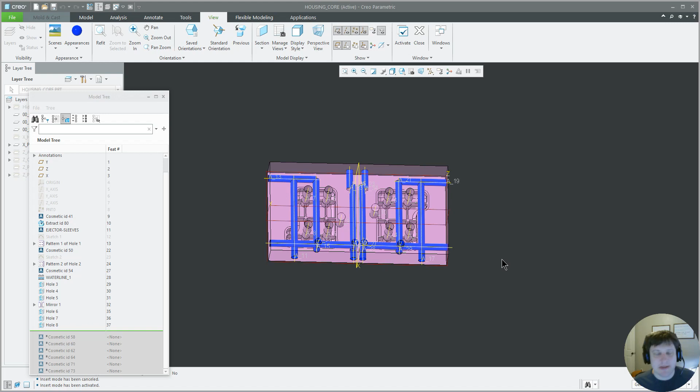We're still working on that injection mold, the first one. I mentioned last time that I was not happy with the water, and coming back to it and looking at it, I can't believe I thought this was a good idea in the first place. So we're going to come over here and delete everything we've done other than the waterline feature. And I have another way of doing this.

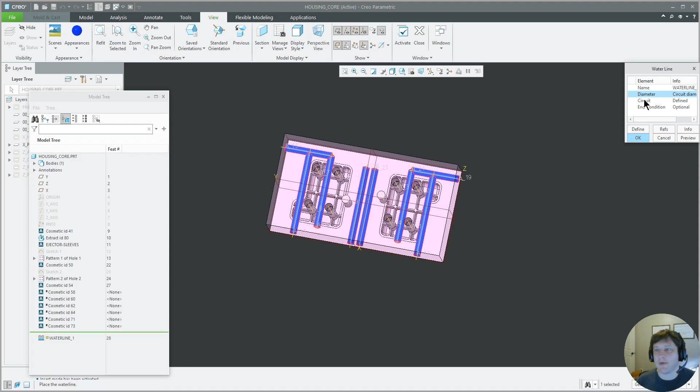And we're going to edit circuit, define, sketch view. We're just going to delete all these. Okay, so what we want to do is we want to come in here, over here, out here. We want to come out here, down here, out here. And we want to come out here.

I'm going to do the same thing over here. We're going to go in here, out here, which actually this will need to be like that. And then over here, over here, and out here. And this will need to be out here, there, there. So then we have in, around, around, and out. In, around, around, and out. All in two circuits. All do not interfere with anything. This is better.

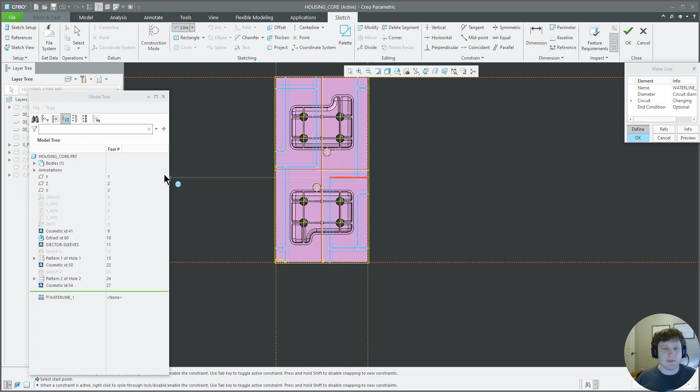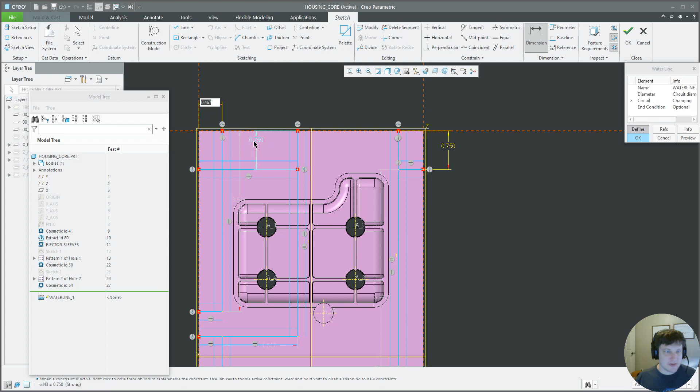So now we dimension this stuff. This doesn't really need to be that close to the edge, so we'll make it 0.75. This 0.75 as well. This kind of needs to be close to the edge. We'll make it 0.5. So 0.5 over here as well. And on this, I need to watch that distance. So we'll make that 0.313. Keep it away from that. There.

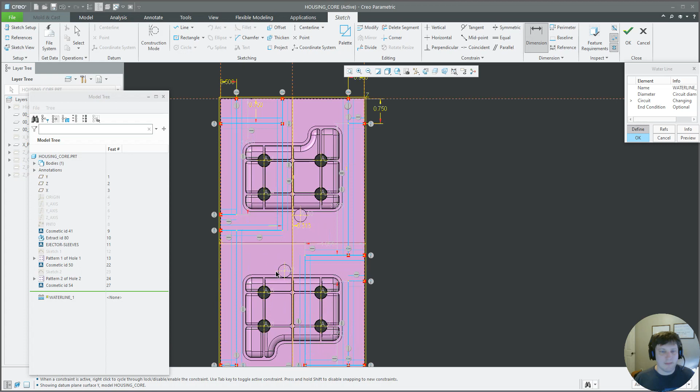And then, let's see here. Here, here. Make that 0. Make this to here. That 1. This 0. This 0. This 1. This 0.75. Oh, they're already. Oops, I accidentally hit num lock. And this 0.313.

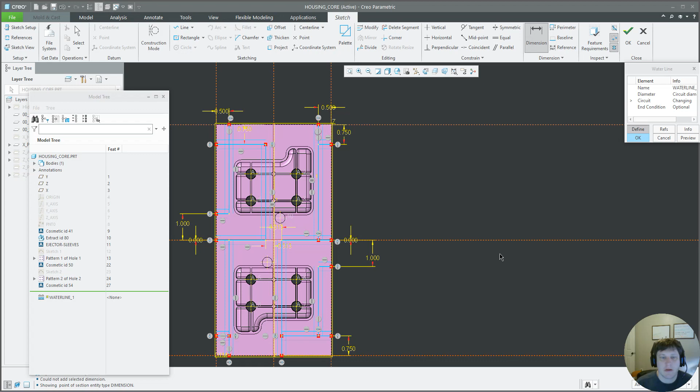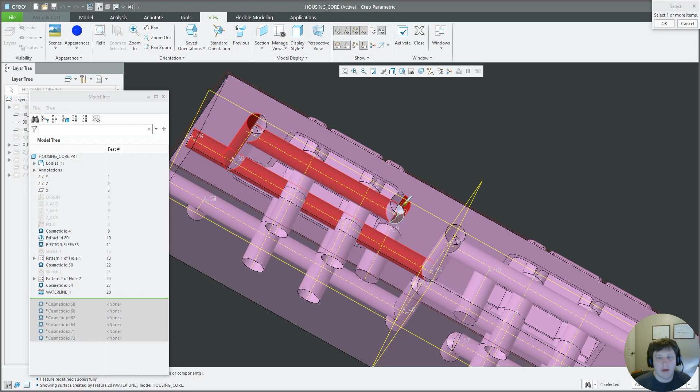And there we have everything symmetrical, so it'll cool evenly in the two blocks. So we have our water circuit in. Now let's color these different colors so that way we can tell which one's which. We're going to color them different shades of blue. We'll color this one dark blue because it'll be easy to see. There. I'll color this one this light blue.

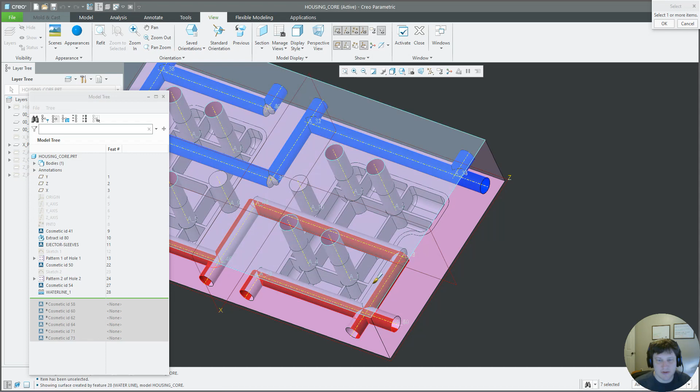Normally I used to reserve these colors for machining operations, but since I don't work for that company anymore, there's no reason to do so because it had to do with their programming software. So instead I just use them as the best fit for showing things.

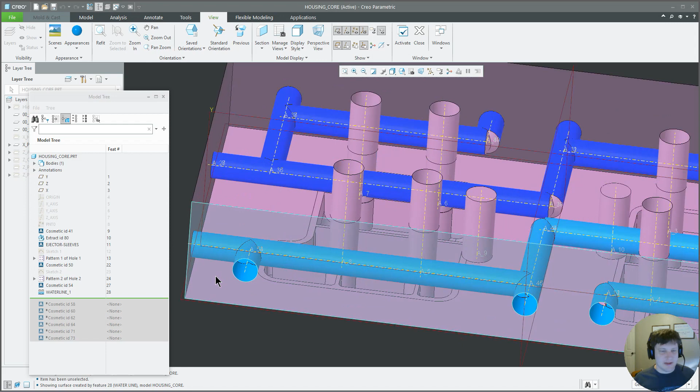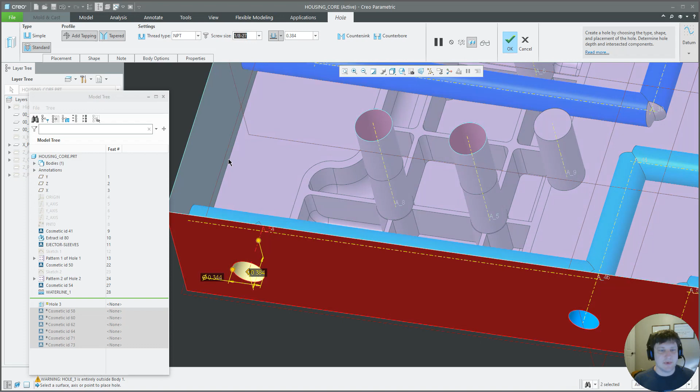There. Now we do need to add pipe plugs to all these because right now they're just blind holes. There's no way to plug them to keep water from coming out of them. So what we want to do is go to hole, standard, tapered, NPT, 1/8 inch NPT, that's the right size, confirm.

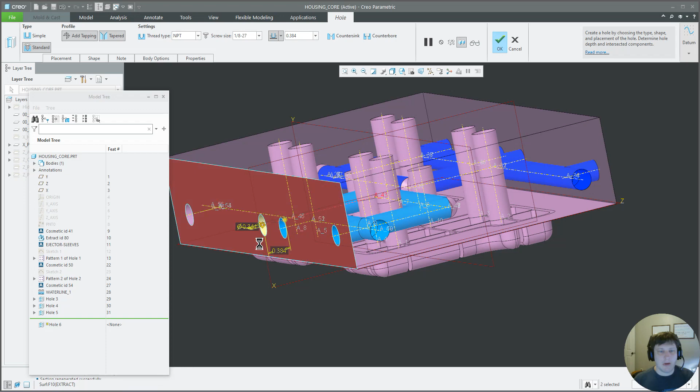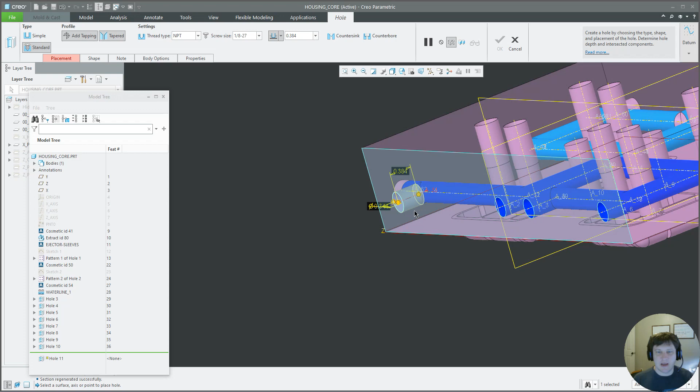Now I can go through that all over again every time, or I can just hit Control C, Control V, and I can just select my axis. Once I have hit Control C, I just need to hit Control V. You cannot do that if I were to put this one on a pattern, like pattern it between these two; then I wouldn't be able to Control C, Control V anymore. It has to be a blind hole.

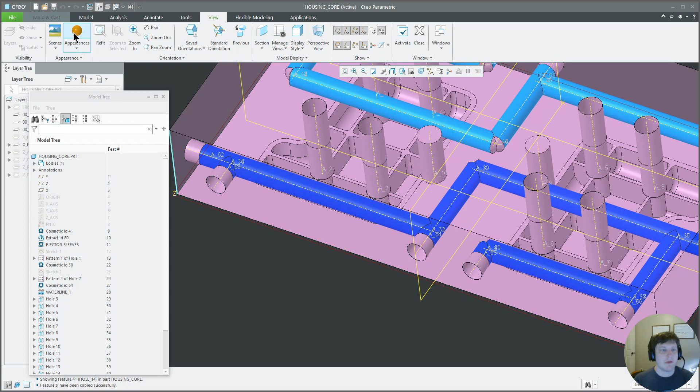And if we want to make it easy on ourselves, we'll view, color, we'll make these, and these the different colors so that we can tell that those are the exit and entrance lines for the mold. So when we put them in the other blocks, we're fine.

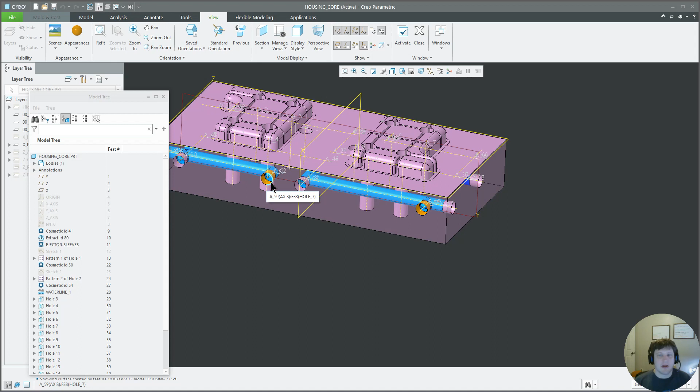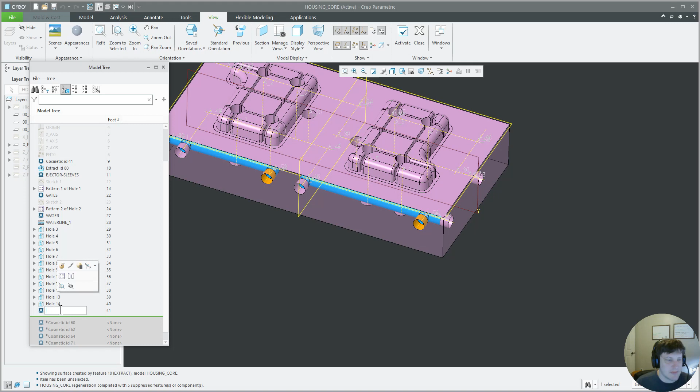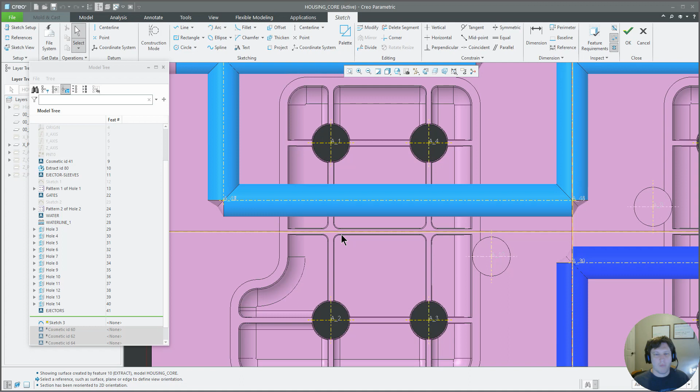Now, really, I don't really want to get into ejectors right now because, well, why won't this resume for me? There we go. Oh, let's name these real quick. These are my gates, our water. This is my ejectors. So ejectors. So we're going to come in from the back. I'll sketch view, sketch. Now we're going to come in here and really, let's see how this works.

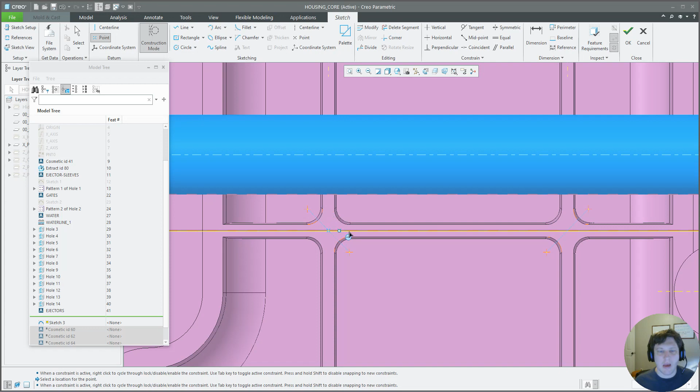So we can put a 98 ejector pin, maybe about 100 thousandths from the wall. So I'm happy with that. We can do that. So we'll put 2 ejector pins, and we'll just do this to place them. That way they'll be in the center of that rib. One right here, one right here, one right here, one right here.

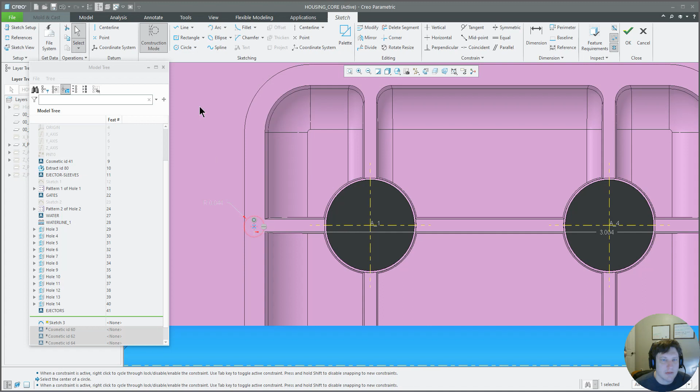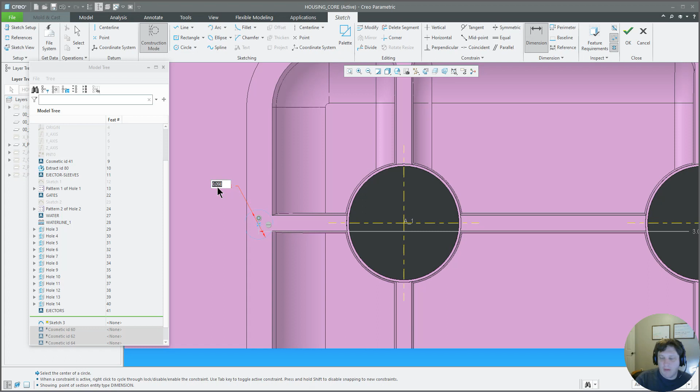Now these ones, so we're gonna go 98 ejector pins. Okay, so 0.098, not a radius. Watch that. Double click, center mouse, 0.098, actually it's 0.094. And just, can we get this ejector pin on there?

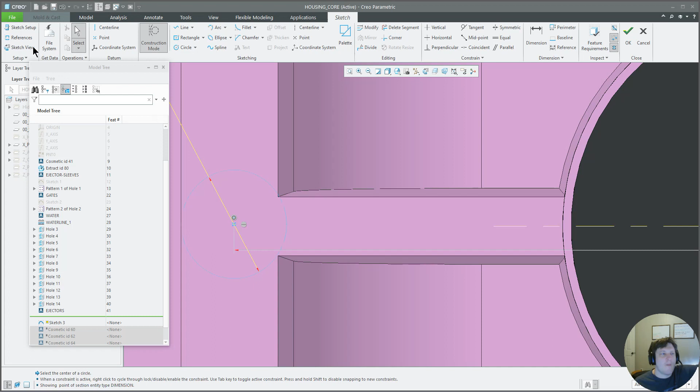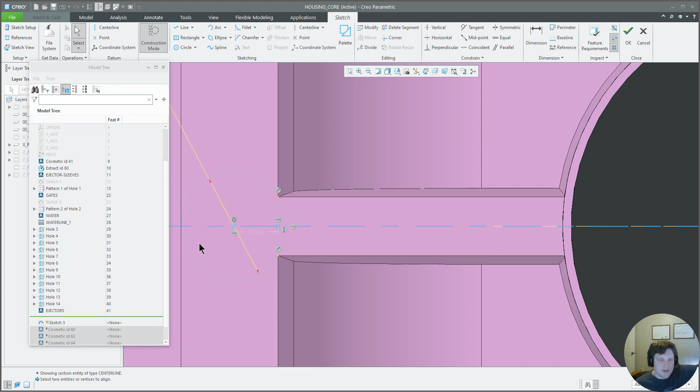See, we just can't quite fit in there. We need those corner radiuses. Well, let's see. Notice how I'm doing all this in construction mode, so that way only the points will come through in the sketch. And you know what, this is sometimes common practice where we'll just eliminate those corners in the hole in the part and just make a flat ejector pin.

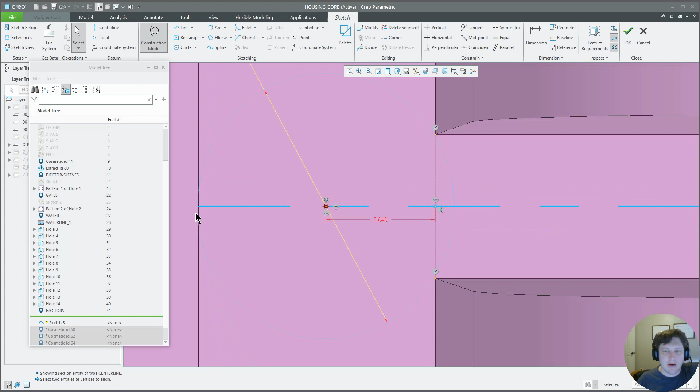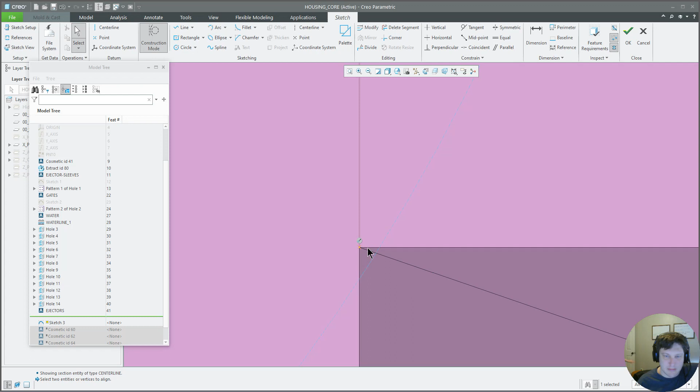So let's make that 0.040. Let's see what that does. Too far. So I could go back in and add radiuses to these to make that ejector pin work. But if they don't want me to, and we'll pretend they don't want me to right now, I can just go ahead and eliminate that corner. Minimal effect to the part.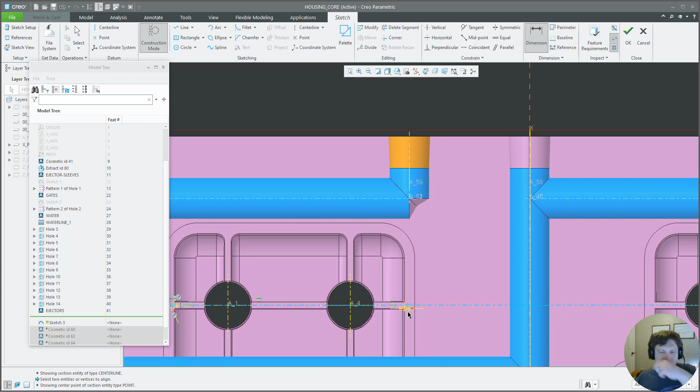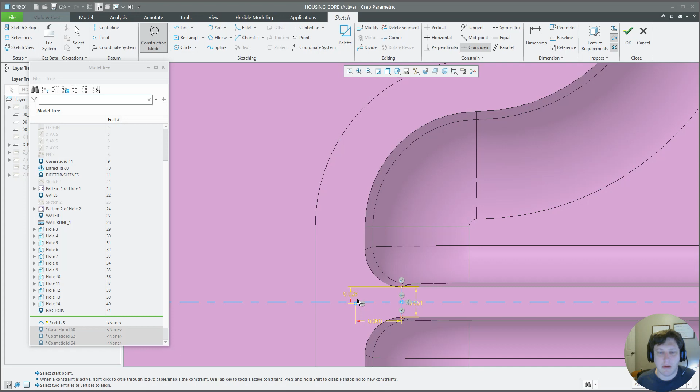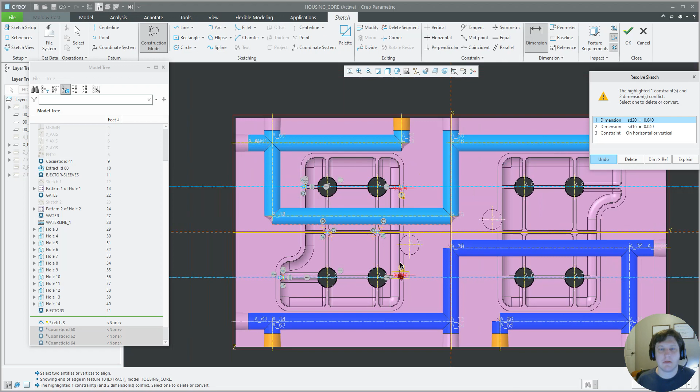So now this one was actually planned for this, and they allowed for it. Let's see. I should just do this so that they're both on the same line. But sometimes our vendors, no planning. So we're gonna do the same thing we did over there. Oh, this one's in line. Shouldn't be 0.040, it should be 0.039. There we go. Now we have these. So notice we didn't do it to the other part. I'll get to that here in a second.

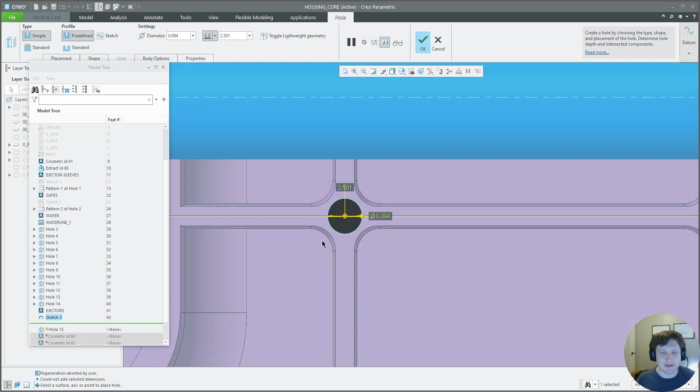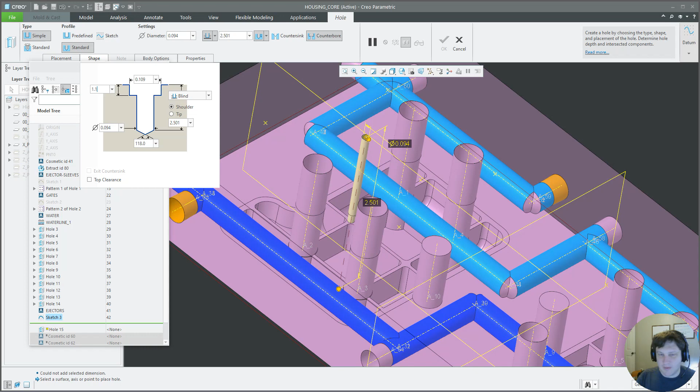We're going to go to hole 094. That's a standard ejector pin size. Now we want to go 15 thousandths over for our relief from the back. So 0.094 plus 0.015, 109. Now we want to go within 100 thousandths of the front side, so like 2 inches. 2 inches too far. 1.75 too far. 1.5 too far. 1.25. So we're close. 1.125. Then we have a nice little bearing surface that doesn't constitute too much.

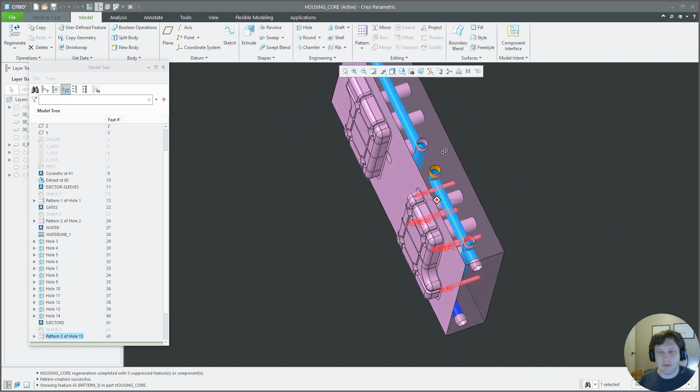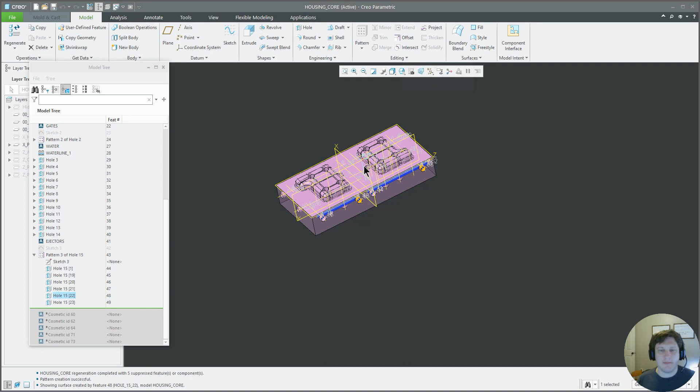Pattern, point, put them on all locations. There we've got our ejector pins in. Let's make sure they're there. This rotation's a little crazy. This mouse is a little bit. You can just see we just barely clip those corners. Didn't even show it. So that's how minute that little part was. Now we're going to do a pattern, geometry pattern.

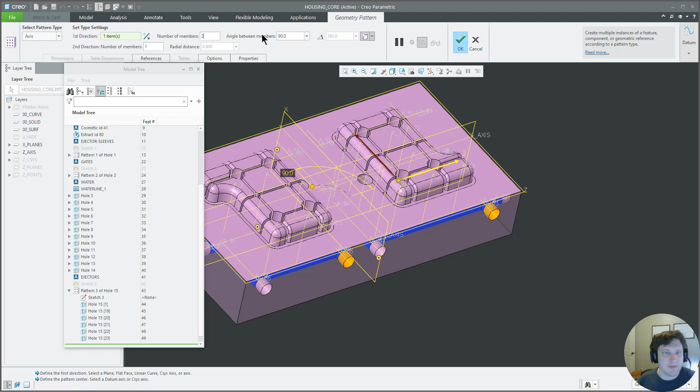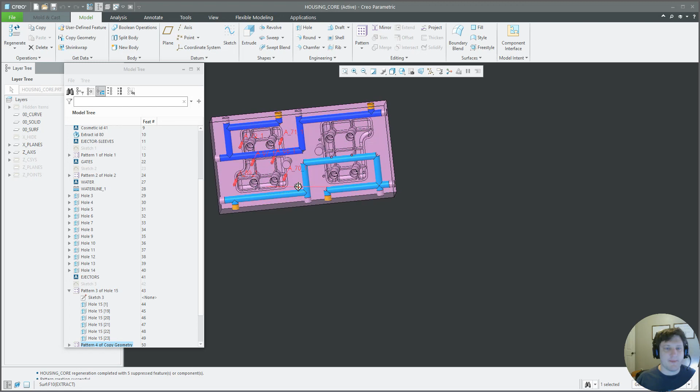We're going to have to unhide the axis, grab that axis, and make it axis. I gotta re-grab the axis. 2 members, 180 degrees, and we'll confirm. Now we've got ejector pins in both locations. And we've missed our water. So, there's our ejector pins. We still have a couple ejector pins left to add for our runner and gate, but we will not add those at this time. We'll add those later.

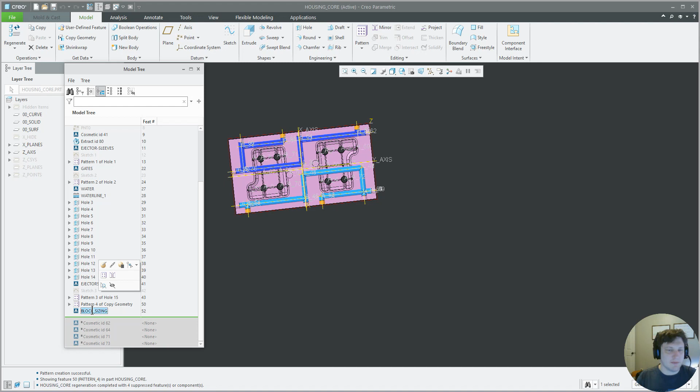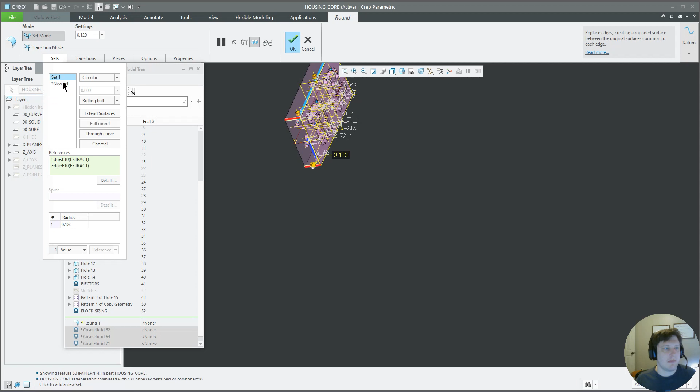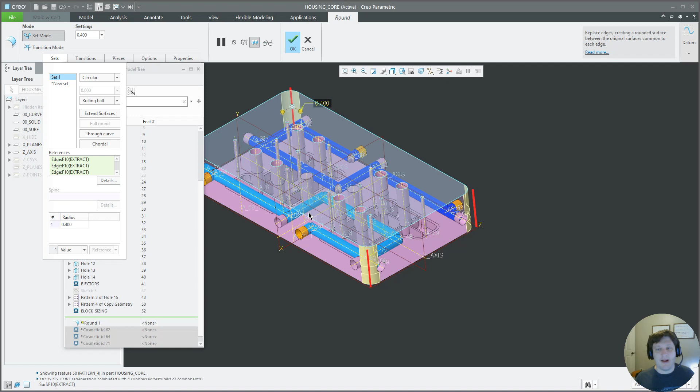So now we just need to clean up the block. I don't know why that won't let me resume that, but the block sizing. So first of all, we add some radiuses to the corners here. Well, let's make them nice and big, 0.55. Oh, I didn't hold control. If you don't hold control, it adds separate sets. So 0.55 is a little too big. 0.4 is okay. So this way I can do a 0.375 radius in the block that this mounts into, and there will be clearance in the corners. So there's that.

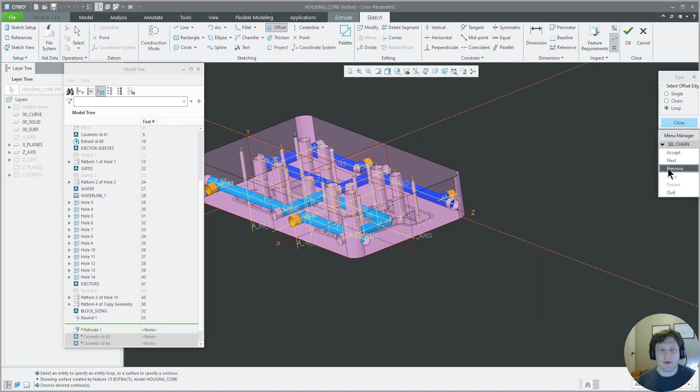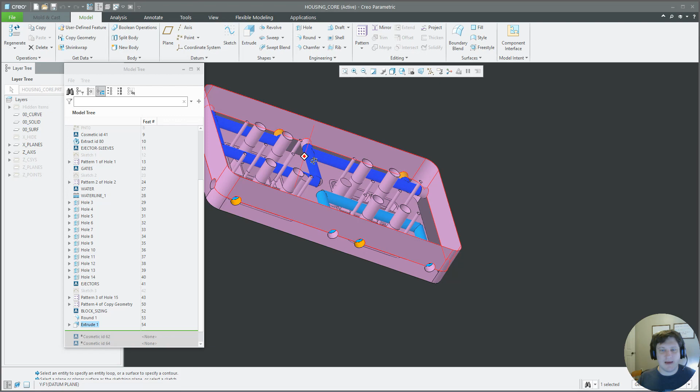Now I need to do a clearance cut from the back, again for fitting. So we're going to do an offset loop, grab this, next, previous, there we go, negative 0.005, 5 thousandths net, and this is 0.875. Now we're going to switch directions, and it's only going to cut away from the outside of the block. So now when they fit this insert into the pocket, they only have to fit this ½ inch here, and they don't have to fit all this back here. So it makes it way easier to put the mold together.

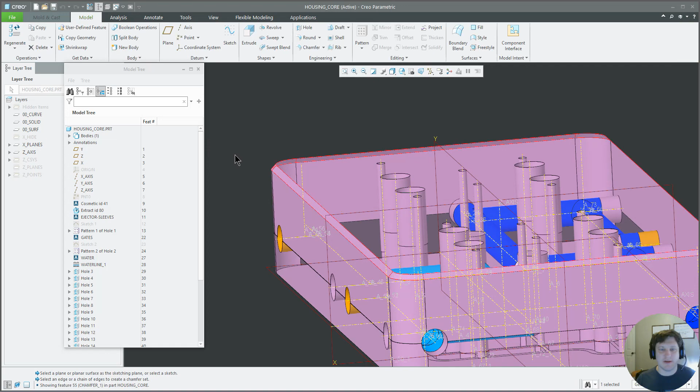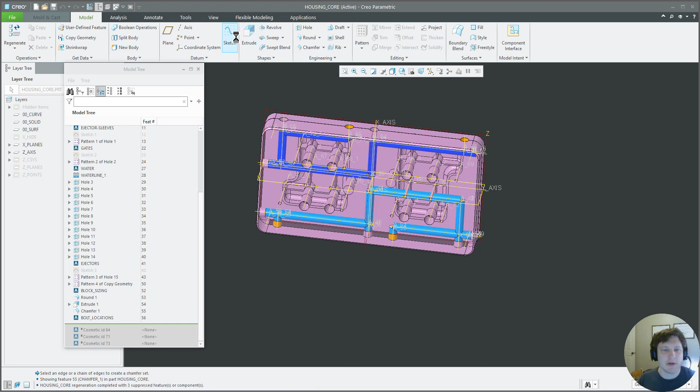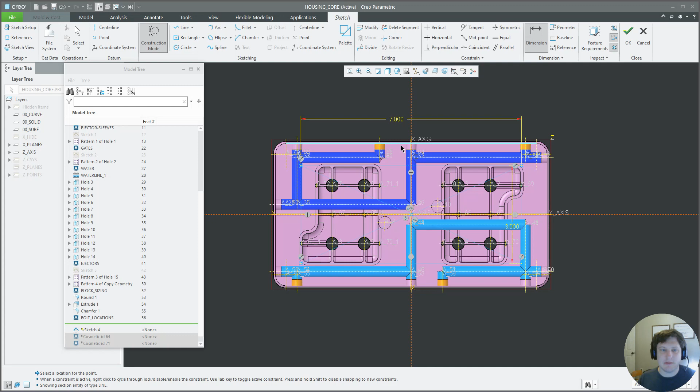Now, chamfer, to make it fit in easier. Doesn't need to do much, just something to break the edge. And there we go. Now we've got ourselves a mold block. The only thing we're missing is bolt locations to locate the insert in the pocket. We'll do a sketch, do a rectangle, construction mode, rectangle. Do a point on every point. And 3 by 7. And we'll see what's good enough.

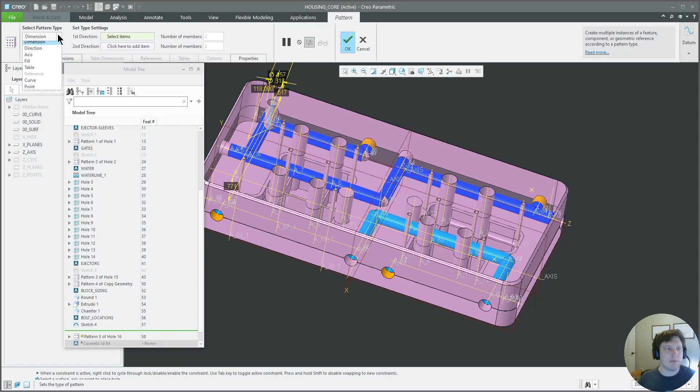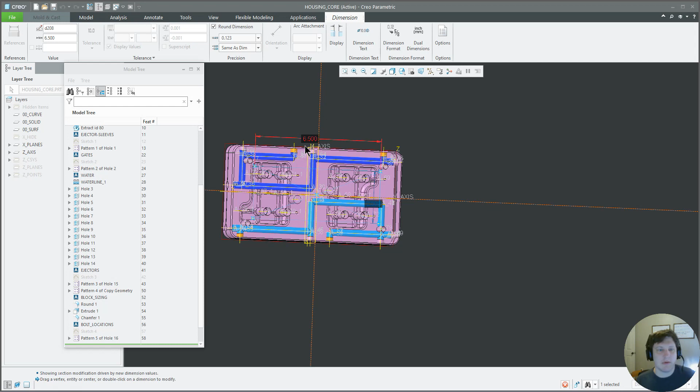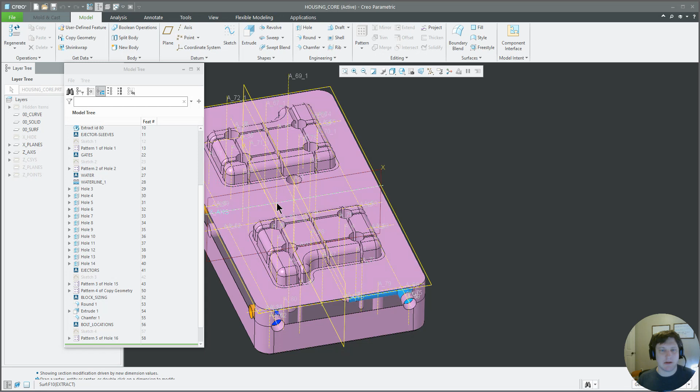And we'll probably need a 5/16 hole. Mount these, something not too large, something not too small. And this is where we may run into problems. Yep, we are hitting our water line. So let's go ahead and pattern that. So now what we can do is come back into our sketch, move it in, and move it in. There we go. Now we're retaining our insert without hitting that. Now all we have left on this insert is a runner and a sprue puller and a gate, and then venting. So we're almost done with this insert. We're going to leave it for now.

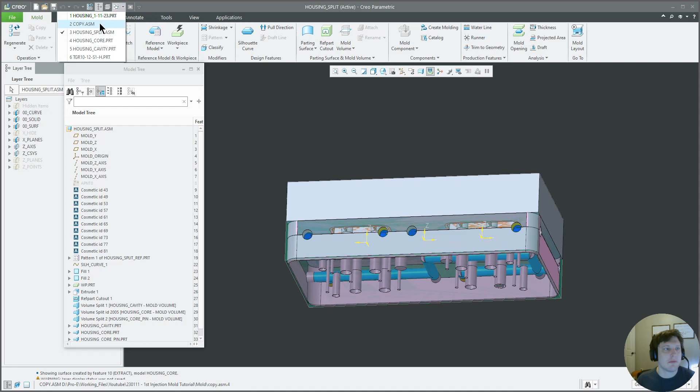We're going to go on to the other insert just to move it along. Then we'll go back and we'll save everything. Save. Let's close that. We'll save this and close it. We don't need it right now. This is the next block we'll be working on. Okay.